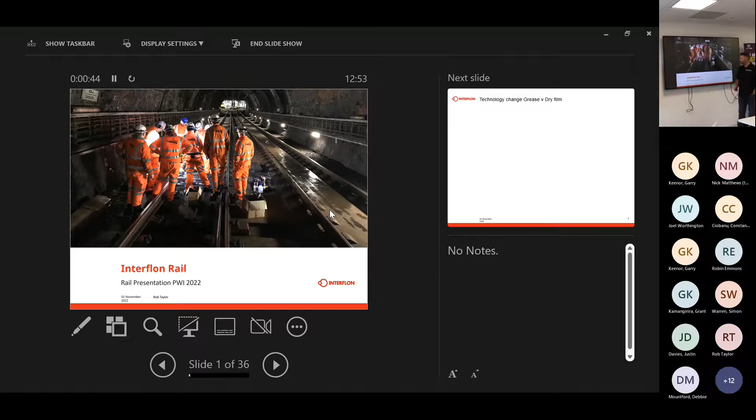So a little bit about the technology of the product, but I'm sure anybody who's been out on track is used to seeing this type of application out on track in switches. This has been around for many a year. It tends to be the more grease you put onto the slide chairs, the better it is deemed as being performance. And this is typical of Interflon's technology.

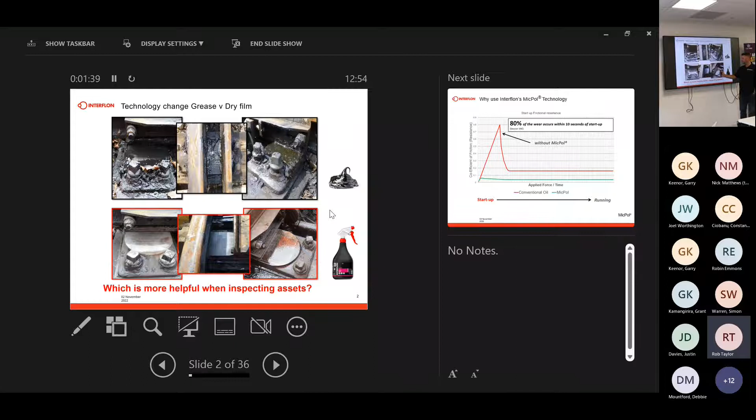And this type of environment and coating is ideal to do any track inspections. So why use MicPol? Well, the first 10 seconds of any machinery moving, you get what we call startup friction, and that's what the red graph shows here. So the first 10 seconds of movement, say for instance in a switch, you get all the contact between the two surfaces.

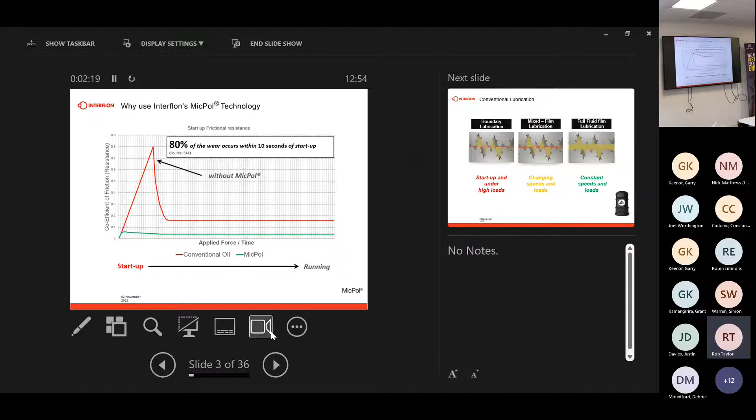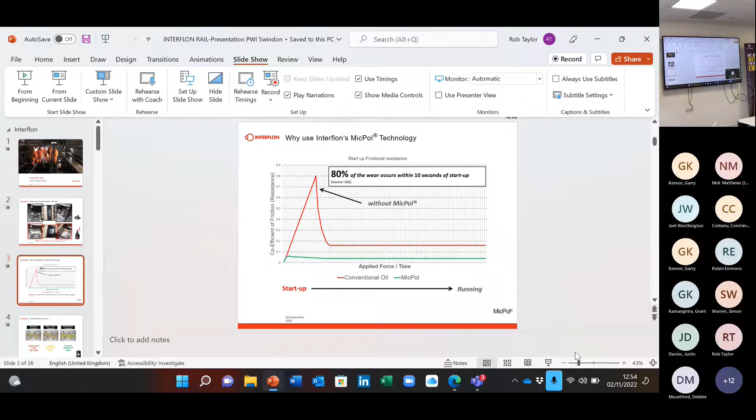Sorry, Rob, can I just ask you, Sarah has asked, can you change your display settings so you can see his notes? Yeah, so at the moment we're seeing you in presenter view. Sorry, it always tries to be crazy, wasn't it? Me as well, just bear with me. Right, so you want to go to slideshow, take presenter view off, and then is that F5? I can't see, is it down here? Is that better? Yeah. Yeah, yeah, that's it. I'll quickly go back then.

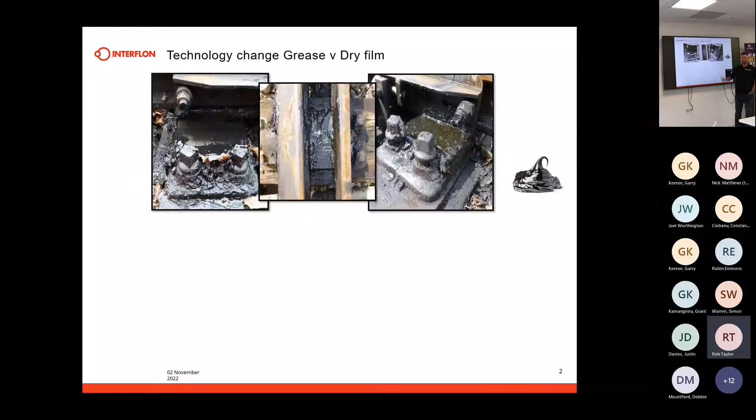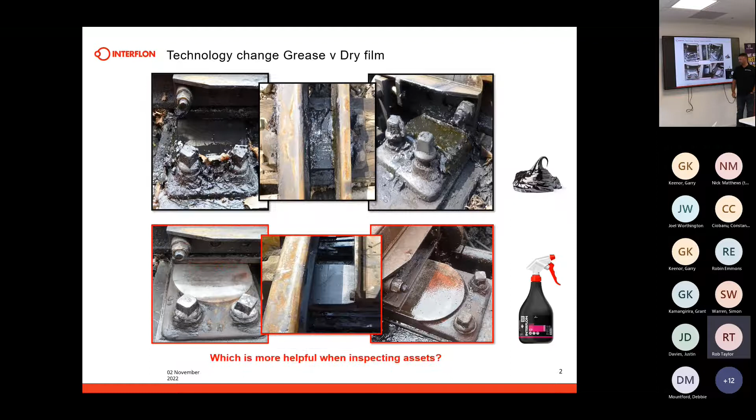So again, this is what you're traditionally used to seeing out on track. Copious amounts of grease, not ideal to do a track inspection. And this is what you're going to see with Interflon's technology, which is in virtually all our products. It's a completely transparent coating, ideal for the PLPR train that's out on track to be able to inspect. That's again an idea of where Interflon can be used to look for any defects in any components out on track. But this is a lot more helpful when it comes to detecting any cracks or issues on track.

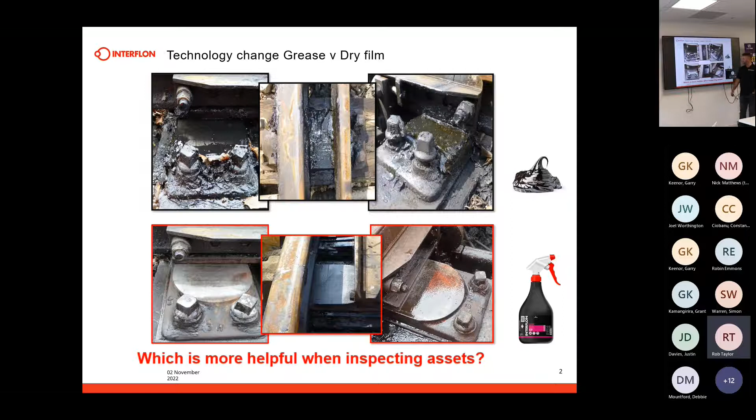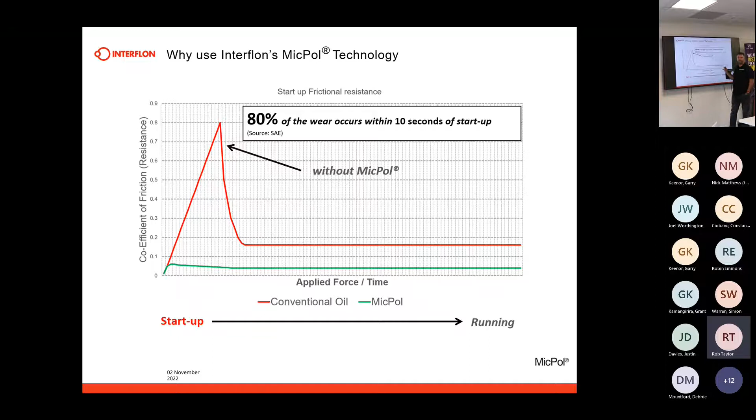So again, going back to the graph, any machinery that moves, you get this initial startup peak, and this is where 80% of the wear is caused within the first 10 seconds. Because obviously you've got no fluid film between the two surfaces, you've basically got two materials resting on top of one another. If you actually use MicPol technology, it gets away with this because you've actually got a physical film between the two surfaces. You actually get to the green line here, which obviously then increases your asset life, etc.

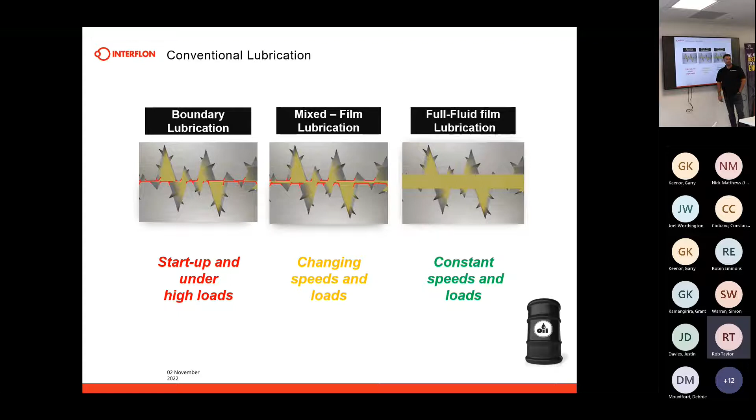This is typical of what you would have with standard lubricant. So this is where you've got the two surfaces resting together. It's not until you actually get to full fluid film that you get a full separation of the two surfaces. But then, of course, as loads and speed start to change, lateral loads when trains come through, you get back to this scenario. And this is again where you pick up a lot of wear of your assets. If you're going to make assets last longer, you need to be able to have that protection at startup.

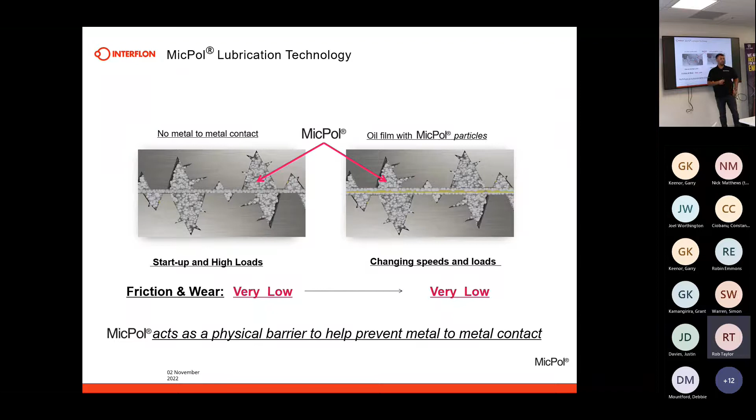Interflon now is very, very different. So we just don't rely on oil to lubricate and give you the fluid film. We actually have solid material particles in there that are less than the size of a hair follicle. So if a hair follicle is 80 microns, we're milling our products down to 0.1 of 1 micron. That then fills all the asperities within the surface, whether it be plastic, brass, bronze, steel, but also more importantly, it leaves a full micron layer, a hard fused layer to the surface. So you get rid of all the startup friction and all the wear.

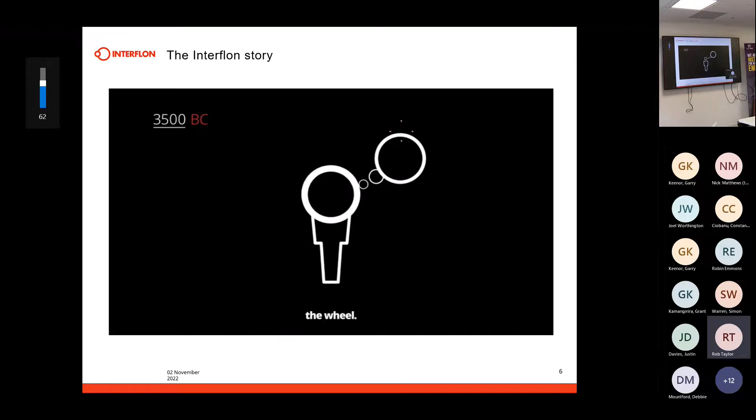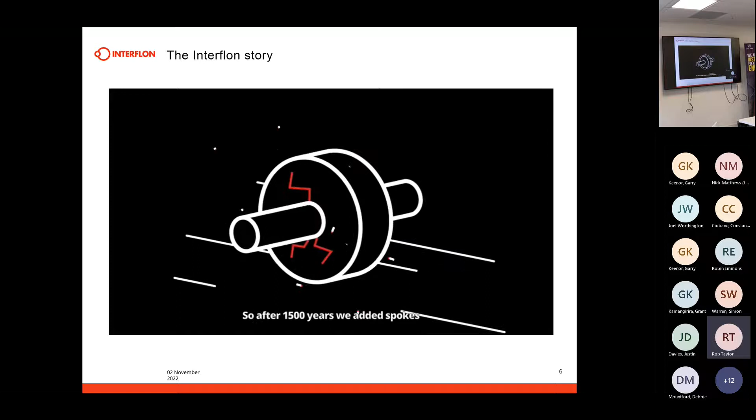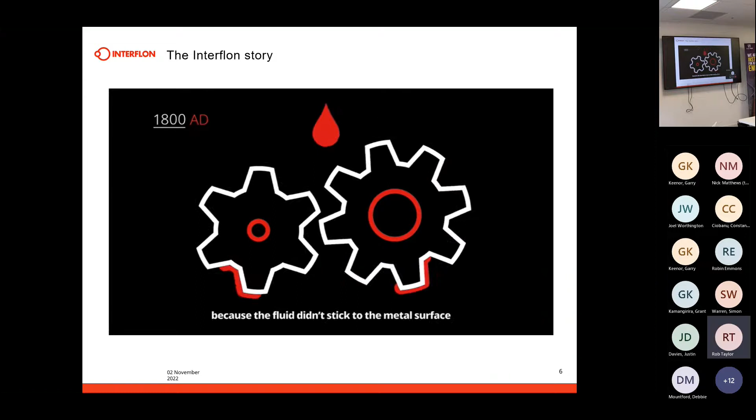3500 BC, humanity came up with a brilliant idea: an invention that would change the world by making a centered hole in the cylinder and adding an axle. That would enable heavy transport, but its use also meant friction. So after 1,500 years, we added spokes, but this didn't eliminate friction. And when the wheel evolved to gear complex machinery and even more friction, even the discovery of lubricant didn't fully solve it, because the fluid didn't stick to the metal surface, still resulting in wear and ultimately breakdown.

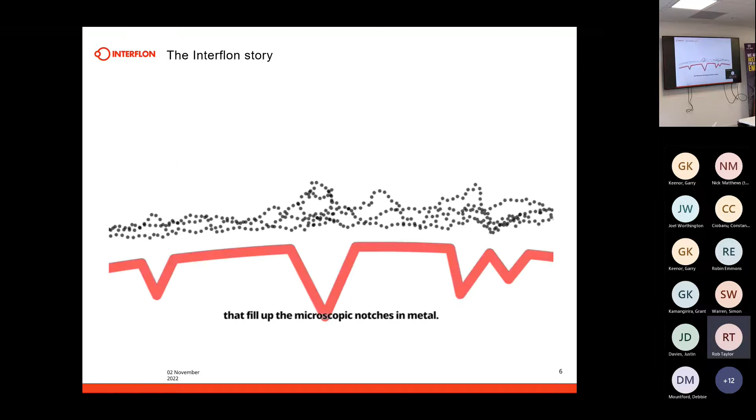Embrace innovation to benefit tomorrow. Interflon.

Okay, so MicPol is a process of particles. That's what Interflon specialise in, being able to break into particles and actually get them to stick to whatever we want to put that to. That can be any material, glass, plastic, brass, bronze, you name it, it can stick to it. And as you saw there in the video, we micronise the particles to such a size we can actually fill all the cavities up in the metal asperities and leave this bonded layer behind.

So we'll now go through what I know of Interflon, because again, it is a trade secret. So it's developed in-house by a team of scientists. We're actually owned by scientists. There's no commercial people in our business. It's owned by scientists. One of the chief chemists for DuPont, a gentleman called Dr. Wim Horsmans, was our founder.

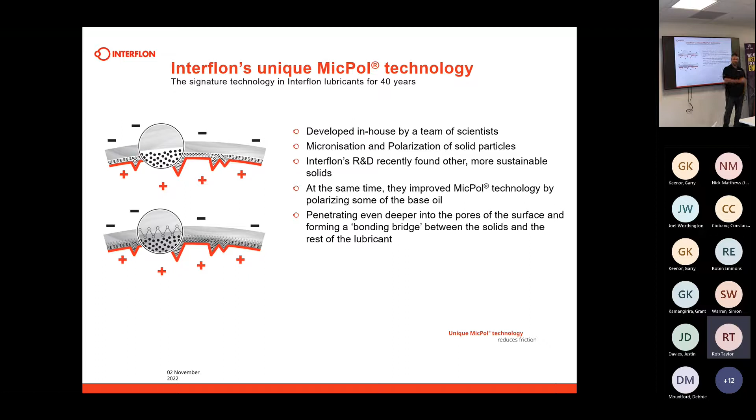We're now starting to see some tests that we've done in Network Rail, where originally they've gone from weekly or twice weekly lubrication using standard products into using Interflon, and now going 4 weekly. We're now using this technology, we're now going to be doing 8 weekly between lubrication intervals. So again, by having that technology, we can actually increase or decrease the lubrication intervals and obviously make the assets last longer as well.

So it helps with metal to metal contact and stick slip, as we call. It's also weather resistant as well. Whatever you chuck at it, we apply this product out in Taiwan that has horrendous weather conditions. This product's completely water resistant. Okay, likewise, it's hydrophobic. So if you've got ice adhesion, it's not actually going to stick to this product whatsoever, because obviously you've got this hydrophobic layer. And also as well, what's also important is what tends to kill lubricants is UV light. This product is completely resistant to UV light, so it can't deteriorate as well.

It is biodegradable, 98% biodegradable. But what I will remind people is, to get something to biodegrade, it needs to fall into the floor where there's the organisms, so the ground. So wherever it sits on the assets, it's not going to degrade. It's only going to degrade when it falls into the ground.

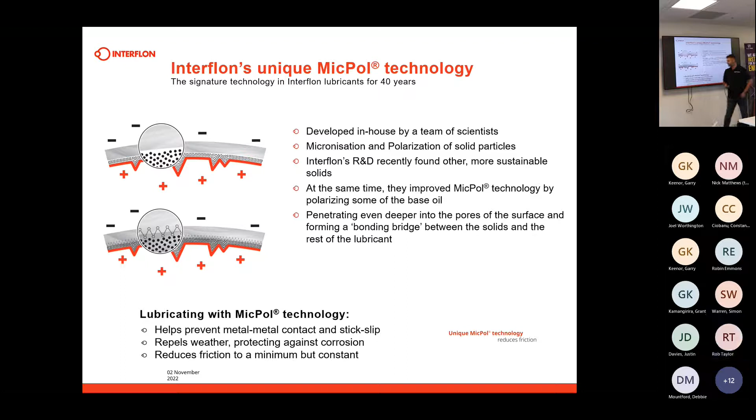So a little bit of the story of Network Rail and where Interflon came in. Interflon Lube EP, as I mentioned earlier, was developed for the German railway back in 2000. The scope was to develop a dry film, all-weather, transparent lubricant that would improve performance and reduce failure. It was a big ask, and it took a lot of development, but we got there.

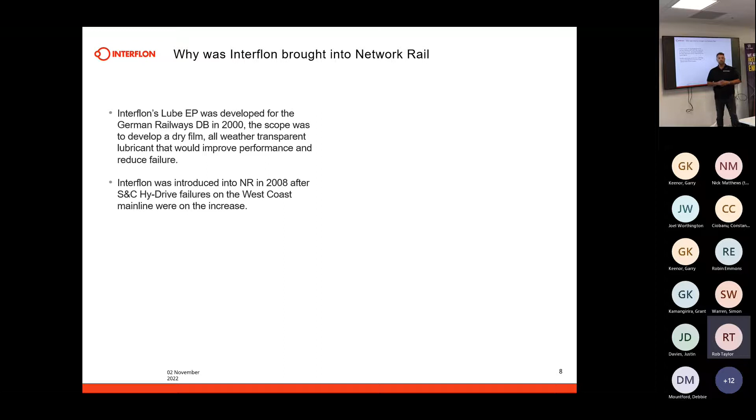Interflon was introduced into Network Rail in 2008 on S&C Hy-Drives. These were the high-speed switches that were actually installed on the West Coast main line. Network Rail spent £9 billion on the upgrade, and was having problems with these Hy-Drive switches. They were actually going to spend another £50 million trying to improve the problem.

That's when I actually got to meet a gentleman called Neil Denton. I'm sure a lot of you will know Neil Denton. He's part of the PWI as well, and does quite a lot of seminars. Neil met us and thought it was a great idea, so we first got introduced back in 2008 on the West Coast main line.

The testing was carried out by senior engineers within Network Rail, including the chief engineer now, Martin Jones, who was pivotal in testing the product - but it was tested by Network Rail, not by us. We actively encourage people to test our technology themselves, because it's all right us saying that we've got the best thing that's going to work on your asset, but you've got to really prove it to yourself. The product was approved after 2 years of senior engineers testing on all routes - it was quite a quick product approval, really.

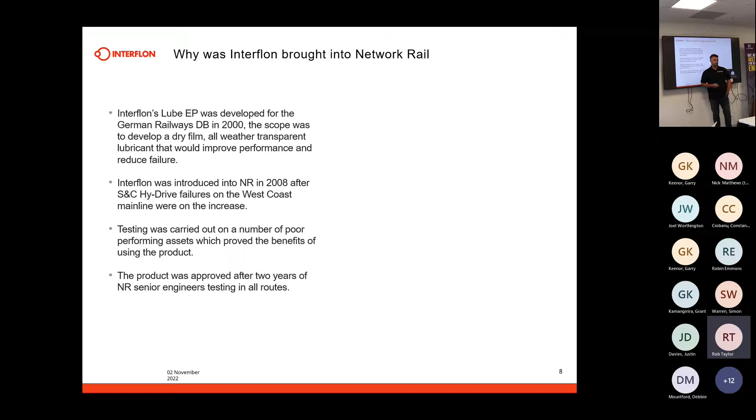These are just a couple of graphs. The first graph in the top corner here was on the East Midlands. You can see all the failures in the form of the different colours here, mounting up. Interflon was applied here at the top one, here on the second one, so on and so forth. But what you actually see is the failures just plateau. It clearly shows you that Interflon had a quite significant effect on the performance of those assets.

Likewise here, these are the high-speed switches. This was in London North Western South. The number of assets are here in purple, and the blue line is actually the failures that those assets are causing. As you can see, the more assets that get introduced, the failure goes up and up and up. The yellow line is when Interflon was actually introduced. You can see the Interflon was first introduced, and this is quite interesting - the more assets it's actually applied on, the failures come down to virtually zero. So again, showing you that the technology had a big influence on the performance of those high-speed switches.

Also, Schwehag - everybody knows Schwihag for rollers. They're independent, and they've got a special machine that does a lot of the testing. What they wanted to find out, or what Network Rail wanted to find out, was what was the difference between this coating and another coating. Molybdenum is a coating that Schwihag use - it's used on a lot of different asset types. This machine actually simulates a switch. For this particular one, they actually put an extra 300 kilos of load on the switch rail, put it on a cant, and introduced humidity into the chamber as well, so they could simulate any time of the year.

What they found was that the friction started here, at 0.5. By the time it had done 20,000 movements, the friction had been so high that the rig failed. So you could say molybdenum is good for 20,000 movements, but the friction does increase from the first movement. However, with Interflon, it surpassed 20,000 movements and went to 70,000 movements, and that friction coefficient is a lot straighter line than this one. If I just add that over the top, just to give you an idea - the friction starts here on a molybdenum plate and here on an Interflon plate. So you can clearly see, again, the coating has a significant effect on friction levels.

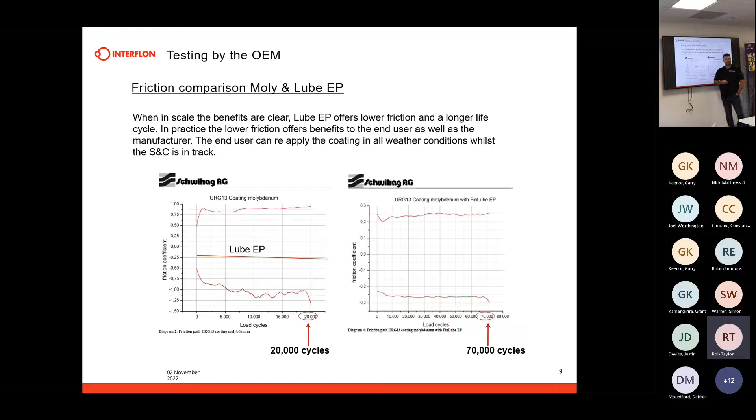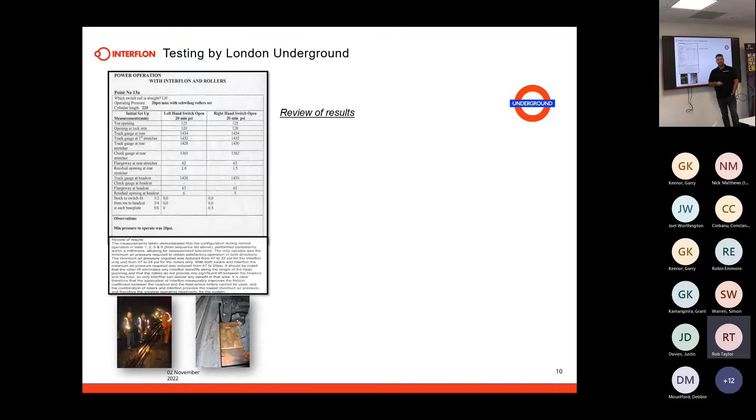It's also very constant. This is a London Underground test of rollers and Interflon, to see what benefits you'd get with one or the other, or both. Because they use air pressure in the tunnels to move switches, they needed a large headroom between pressures. If you had added weight or problems in a switch, your headroom was reduced. They wanted to increase that.

What they found was if they used Interflon alone, pressure dropped from 47 psi to 32 psi. If you used rollers alone, it dropped from 47 psi to 24 psi. Obviously, rolling friction is much lower than sliding friction. However, if you put the two together, there's an advantage: it drops from 47 psi to 20 psi.

A lot of people say if you're using Schwihag rollers on layouts, you don't need lubricant. Actually, this proves you get added benefits from using the product. Plus, you have to remember the heel section, the bit that doesn't move at the back of the switch—you can't get a roller under that position. That's purely where you're relying on low friction. It says here: this does not provide any significant lift between the head cut and the heel, so only Interflon can deliver benefits in that area. From the fixed position at the back of the switch, you're purely relying on low friction, and that's where Interflon can benefit.

There's also another benefit we've learned over the years working with Network Rail, particularly the S&T guys: you can have a problem when a switch rail falls off a roller and back onto the slide chair, because there's still potentially 4 or 5 mil of fit up before you get detection. At that point, a lot of the switch can get back onto the slide chair and you can get high friction. So we've seen a big benefit of putting it all the way through Schwihag layouts.

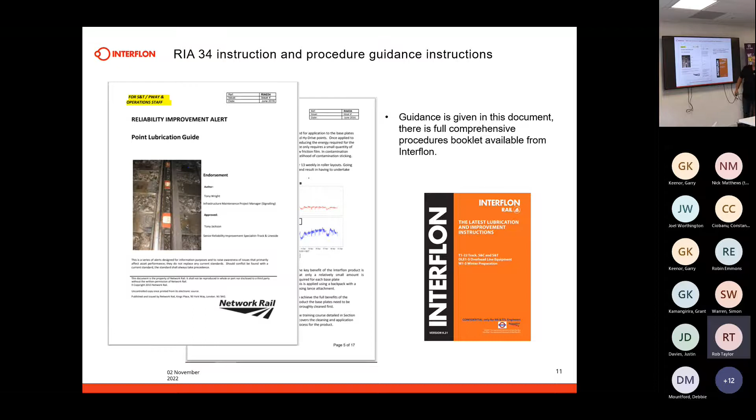Quickly showing you how this product is actually applied, because traditionally you'd use a bucket, a Turk brush, and blast everything with grease.

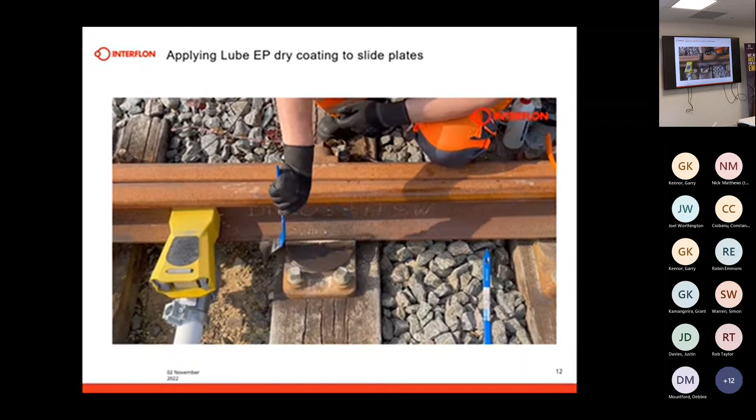Very quickly to apply, you're looking at 1 minute through an average C switch. You'll also notice the switch wasn't reversed—you don't need to. This product uses capillary action to get under the switch and into the heel section. The other thing shown at the end there is applying the product in wet conditions, because we call this a dry film product. You can apply it in wet conditions, and it can take contamination straight away and just brush it straight off.

That was dry sand. You'd expect a wet lubricant attracted to dry sand to create grime in place—quite the opposite with this particular product. Also, you only put on 1 teaspoonful per slide chair. You don't put much product on, so it doesn't make its way into the ballast, so it won't need to degrade because it doesn't get there.

The other important thing about this product is it's not designed to migrate to the rail pad. A lot of people don't think about the rail pad, but if you get lubricants onto a rubber rail pad, you can get what they call delamination. Delamination is not ideal in a switch, particularly when you come to the toe load on a clip. If you degrade the pad by 5 mil, whatever the pad size is, you're actually taking the toe load off the clip. So again, Interflon is not designed to migrate to the rail pad.

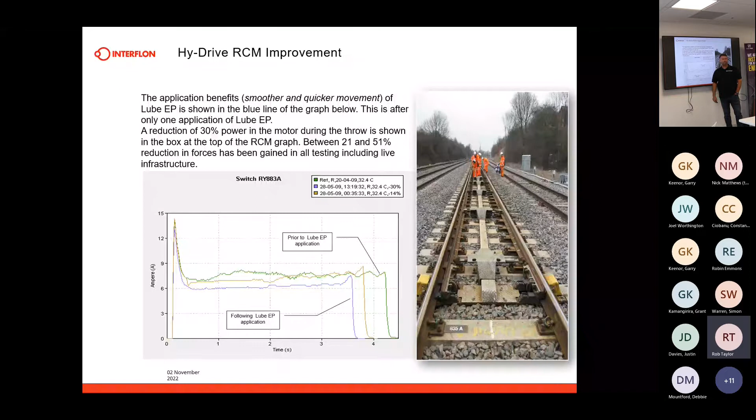So again, it not only reduces the friction, but it can also reduce the time to throw as well. And on the RCM graphic it clearly shows there was a 30% reduction in the power needed to throw the switch. We've done this consecutively throughout different types of switch lengths and switch types where we actually use the product.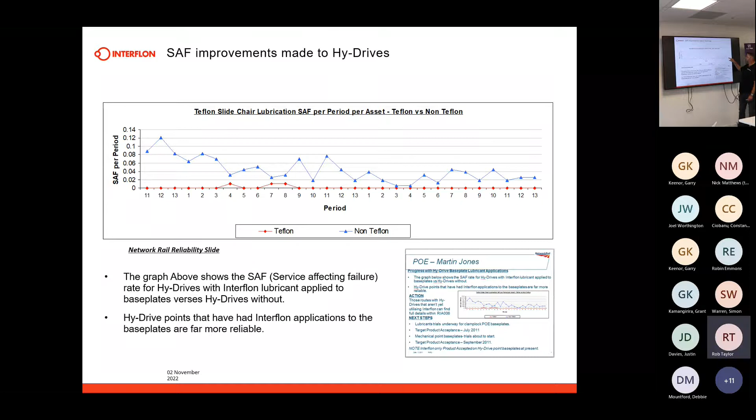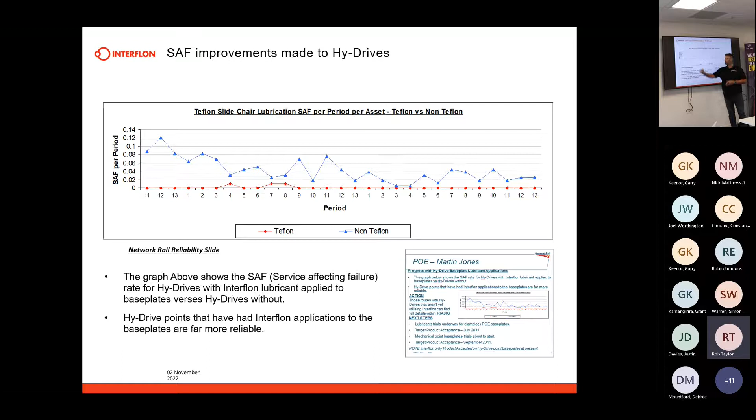Again, another graph here, this time from Martin Jones. So the blue line here is showing your failures using traditional methods. The red line is showing your failures using Interflon. But as you can see, the more ends that Interflon go on, the failures come right down. But what is important is these 2 humps here - that's because they actually ran out of product to put on the slide chairs. So again, it clearly shows you that when you don't run out of the product, you can get to 0 failures.

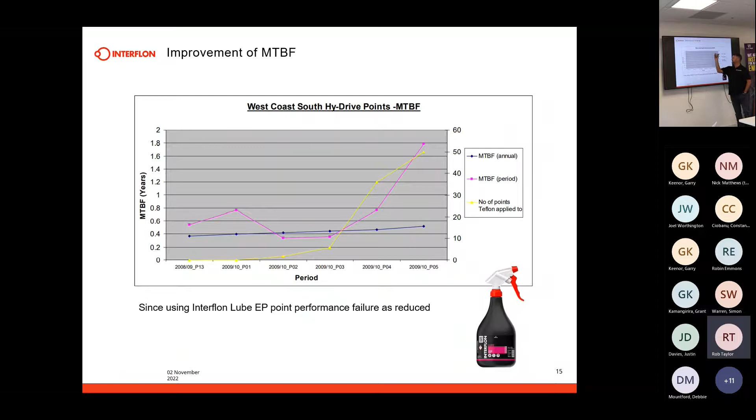And again, this is the mean time between failures. So this is where they were prior to Interflon shown in blue, and the yellow is using Interflon there.

So, Bristol DU on your patch - this was from Dan Collins. This goes back to 2015, 2016. They saved in failure costs over a 3-year period £1.3 million. Sometimes called wooden money because it doesn't come out of your pot, but still it's a saving there, £1.3 million. But more importantly, 627 less point failures by using the technology, reduced overall by 80%. That's from the Western area.

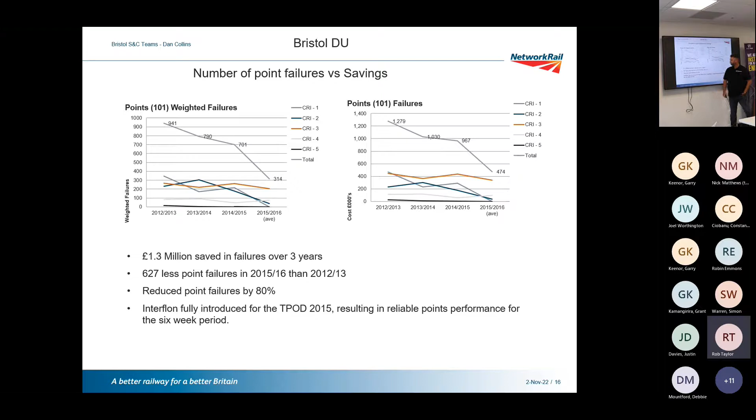We also go back 17 years ago when we first came into Interflon, a gentleman called Richard Owens was one of the route directors for the Midland route. He actually wanted to keep people off track, very much like the safety task force is doing a very good job of doing now. So Interflon have thought about this over the years, and we've actually designed a dispensing system.

So effectively, you can put this onto switches. It can treat up to 2 or 4 ends under one single system. It sits in the cess. You fill it up once a year, and it can actually put lubricant onto your slide chairs. It's actually in development now, because we'll actually show you shortly. So yeah, it applies Lube EP.

We actually developed this system 6 years ago. It went out on track. It was very successful, and it was just about ready for being signed off, but then Network Rail lost its way of what it wanted as a priority, so it got shelved. We've now brought it back out. We've moved to newer technologies and we've made the system even better. And again, it does work very, very well.

It's a clip system, so it clips onto the track. It only takes 30 minutes to actually install it. Likewise, if you tamp it, it's not a problem because everything sits inside the four-foot. And if you're actually changing a set of switches, you can undo the clips, put your new set in, and re-clip it back up in 30 minutes.

And this product is actually being looked after at the moment by a gentleman called Tony Wright in the TA. So if anybody's interested in that, Tony Wright's the gentleman to speak to.

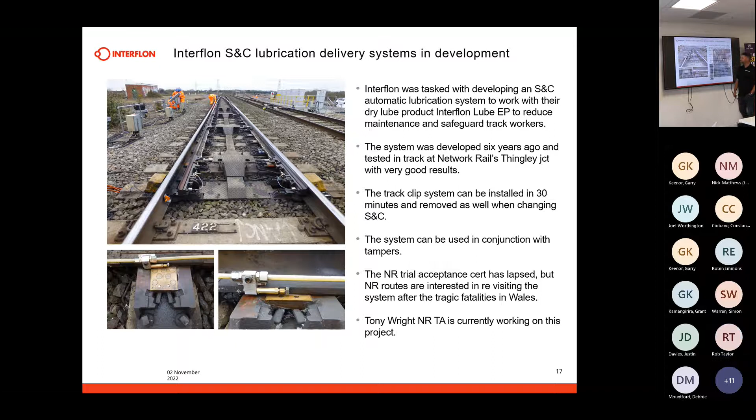So what benefits does it offer the S&T guys? So these are the HW and 63 machines.

We were asked by Scotland whether we could transfer their lithium grease onto our lithium-based grease material, but again, a dry coating. This product's called OG grease. Spray it onto the open gears.

Okay, this is the difference that it makes on the graph. Again, it's a very thin, dry coating, but one that does reduce friction on the gears as well. That's fully been tested, so everything's got product approval.

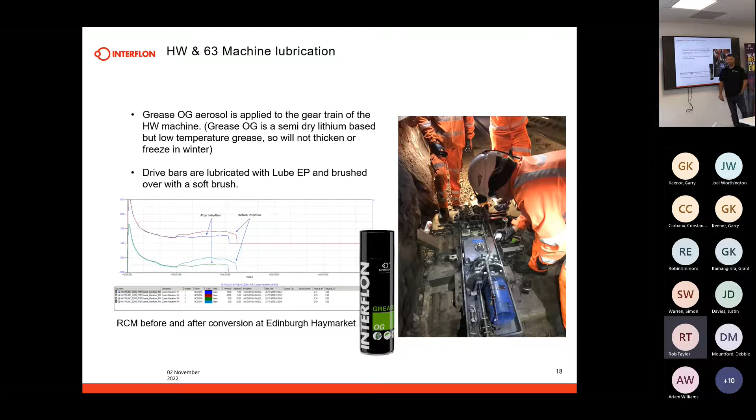Switch tips. So this is where traditionally the guys have gone along and put 3 dabs of grease onto the front of the switch, and then relies on the flange of the wheel on the train to actually spread it through the switch length.

With our product, you don't do that. You spray it all the way through the head planing length. This guy's just going to quickly show you just in front of the switch, and then through the switch, all the way through the head planing length.

And again, this forms a dry but transparent layer. This product's now been approved for this application, I think over the last 6 to 8 years. I think it's also part of the Network Rail specification to use this product.

Showing you here on the right hand side, that's actually got it coated, so you can see it's completely transparent. Obviously the guy at the top there spraying it.

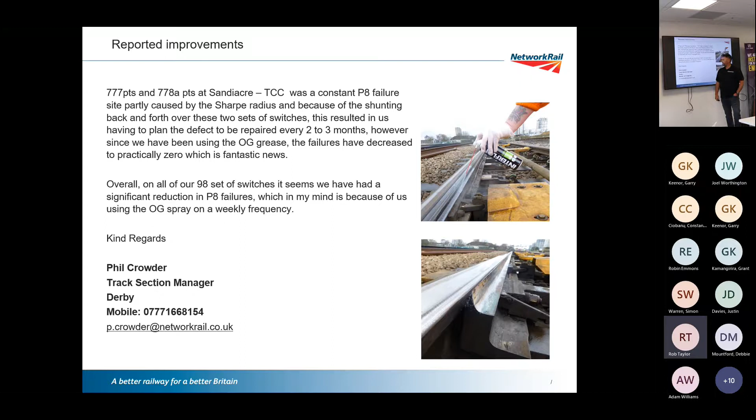This is an email that came from a gentleman called Phil Crowder, basically saying the performance of the product has actually made a big improvement to his failures on his switchblades. So his P8 failures had massively reduced.

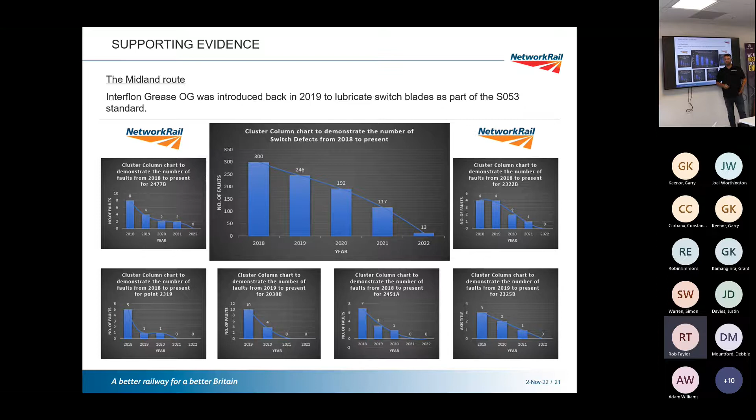So it reduces the lateral loads and the contact fatigue you get between the flange and the rail.

Schwihag rollers, again, East Coast Main Line and quite a few of the S&T guys now using Schwihag rollers. It can actually rejuvenate the lubrication side of the Schwihag roller, but also if you've got a failed roller out in track and the S&T guys are out there to go to the failure, you can actually get a failed roller running in track.

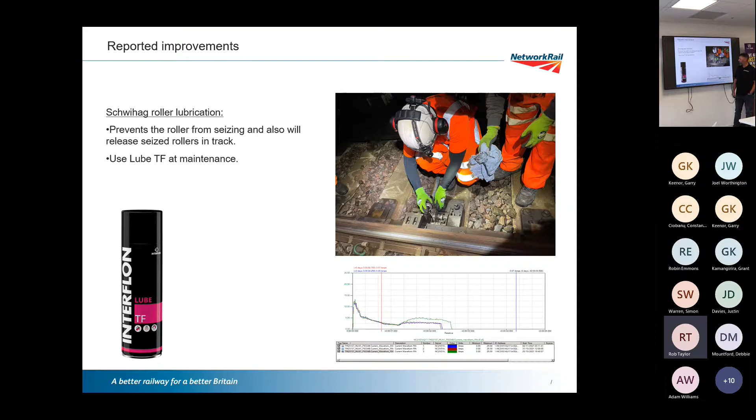And that's the actual graph there. You can see before and after. It seems to be a general use product now, and that's Lube TF.

Again, this is LNW South, so this is the Bletchley DU area. This is data coming back from the STME, and you can see they obviously were challenged to beat the target by 20% on the failures that we're getting on clamp locks.

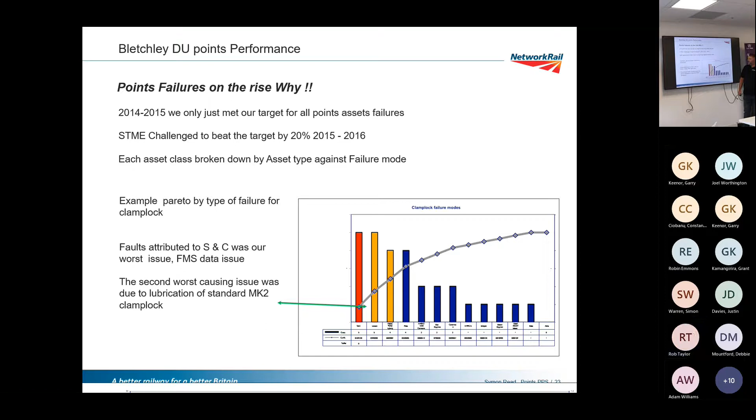What did they do? They completely changed over all the clamp locks to these Simalube systems. So this is an automatic lubrication system for a single point lubricator.

If it's up in the air, you can put it up there for a year. You can pipe it down to ground. It's got enough power to be able to get lubricant to wherever you need to get it into.

This can actually deploy oil, or it can deploy grease. Fully reusable. So again, once it's dispelled, you can fully refill it. It's filled with a hydrogen pack.

These systems are made in Switzerland, extremely good. If you've got areas where you've got flooded components, again, these things work underwater. But again, this is what LNW South completely changed over to.

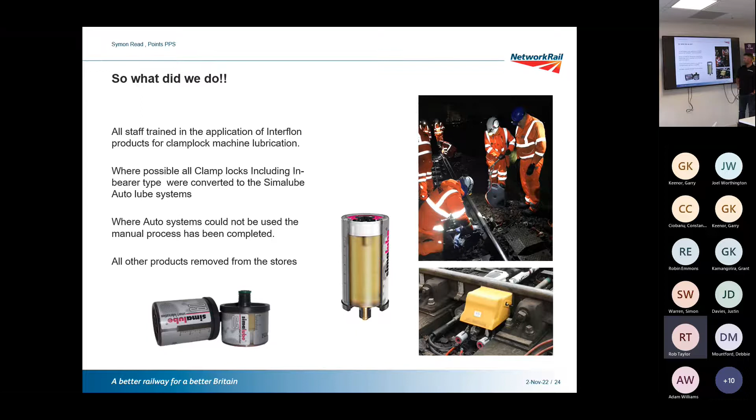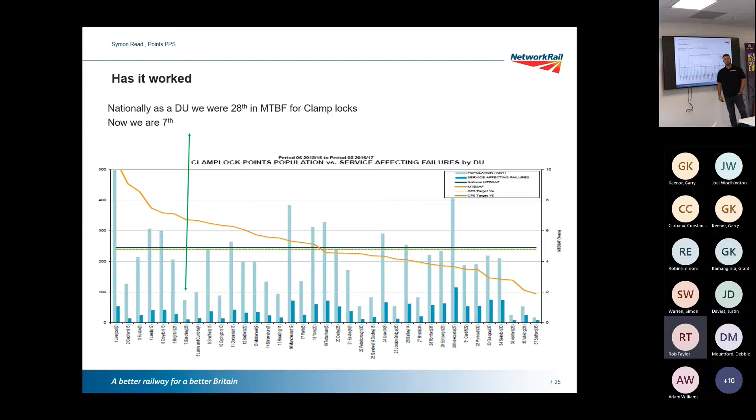Again, these are on cranks. So again, the products can be used on cranks. And again, LNW South have been using it the longest on cranks. They've gone from failures to 0 failures on cranks.

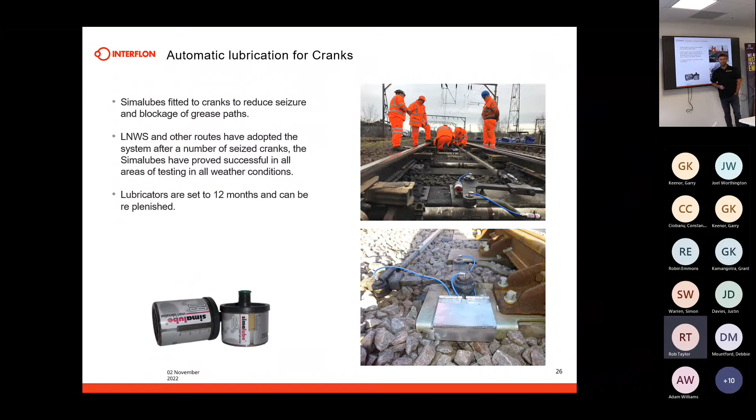Barrier pedestals. Again, you can use the product in barrier pedestals. Again, fully approved.

And then the next application is fish plates. So there's a lot of fish plates up and down the country. Traditionally, you would back off the bolts, pull the plates apart, clean everything, put new lubricant in, bolt everything back up. That's normally a 4-man job, 2 teams of 2, and that takes roughly 20 minutes per joint, something they have to do every year.

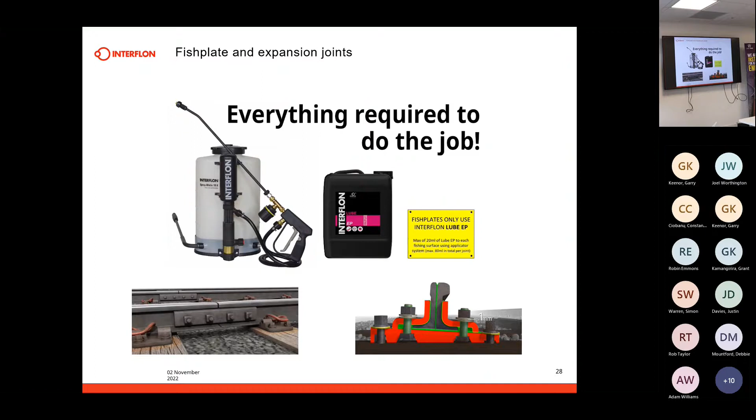So you go from 20 minutes a joint to 30 seconds, a 97% efficiency saving. As you probably noticed there, even I was actually lubricating the joint.

You don't need to back off the bolts. Again, it uses capillary action. No matter how tight the bolts are, it will actually get in. It roughly takes around about 50 minutes to penetrate in. I'll show you a little video shortly, no music added, to show you how well it actually penetrates in.

But the areas have already started to use this and had some fantastic results. What we also found, which we weren't expecting, was a graph that showed if you use traditional black grease, the load between the fishing surfaces was around about 23 kilonewtons. When you actually clean that out and put Interflon on, it drops from 23 kilonewtons down to 2.

What we found in Wales was, when we actually did a full stretch of around about 15 miles, we also found that once we started lubricating every joint closed, the track started to regulate itself. That was an added advantage we weren't expecting. Yeah, it will actually self-regulate.

The 10-litre drum will do about 125 joints. All you need is a backpack and the 10-litre drum, and away you go. There is also a process to change over the bolts as well.

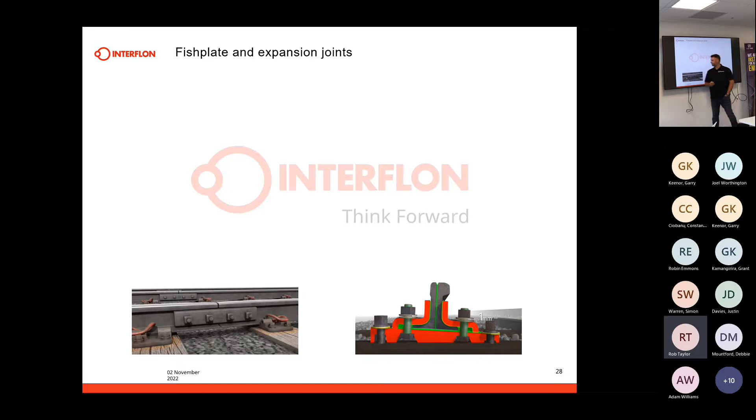You can actually lubricate without opening the joint. It does take one person 30 seconds. It's roughly about 15 minutes. If you just open up the joint after 50 minutes, you'll see it's on every fishing surface.

So you can upgrade stretches of line from black grease joints to dry film joints. It's recommended that the approach is taken to upgrade every fifth joint. There is actually a derogation from engineering to do a complete changeover for Hardlock nuts and Interflon.

This is just showing you how well it penetrates. We've got product and food dye here.

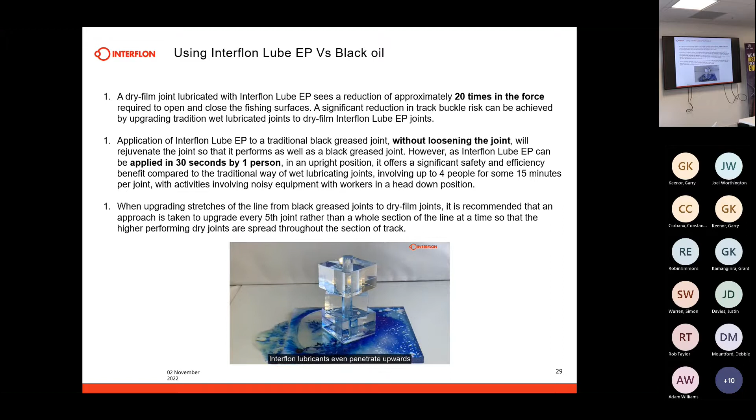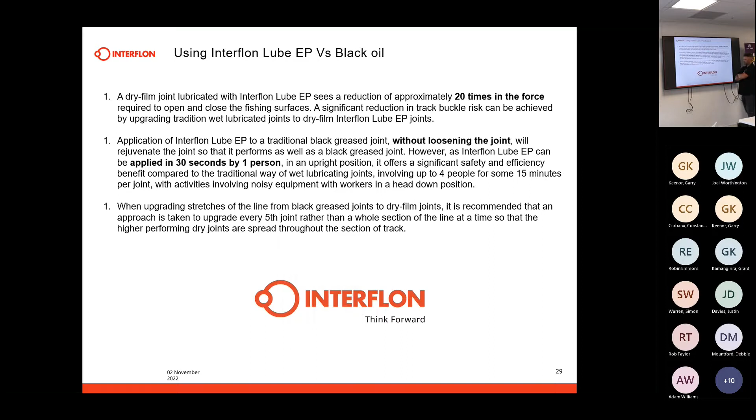Yeah, so that was obviously a bush and a pin tightly closed. A bit of product with a bit of food dye, so you could see it, and obviously it's just sped up. So yes, it's an exceptional product for getting into anywhere you need it to get into.

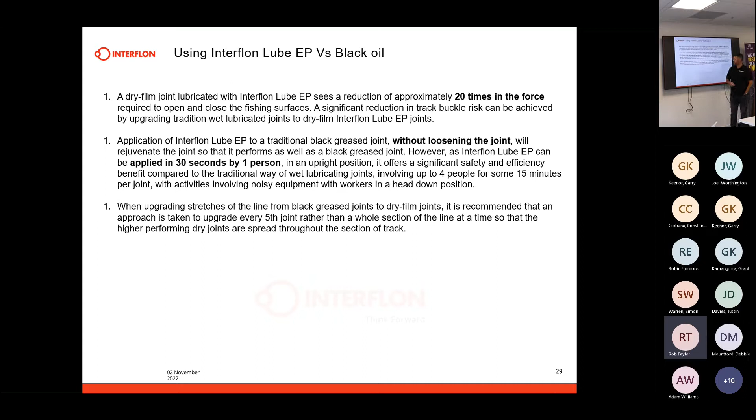These are the Hardlock nuts. I don't know whether the OLE guys have started using these. I certainly know there's been an inquiry about using them because there have been some issues with bolts coming undone. These do not, as far as I'm aware. Well, as I say, they are being looked at now on the OLE.

So what you've got is an offset cam, and you've got a concentric top. Effectively, as it shows you here, it's pushing this way. It's also pushing up as well with the threads, and it locks against the cam. If for whatever reason, through vibration, the bottom nut turns, it tightens back up against the cam again.

These are actually used out in Japan, and have been used in Japan for the last 30, 40 years. No issues at all. They're also used on stretcher bars after Potter's Bar - all the stretcher bars that are in S&C. So again, if you used these nuts and bolts on the OLE, they're not going to come undone under vibration.

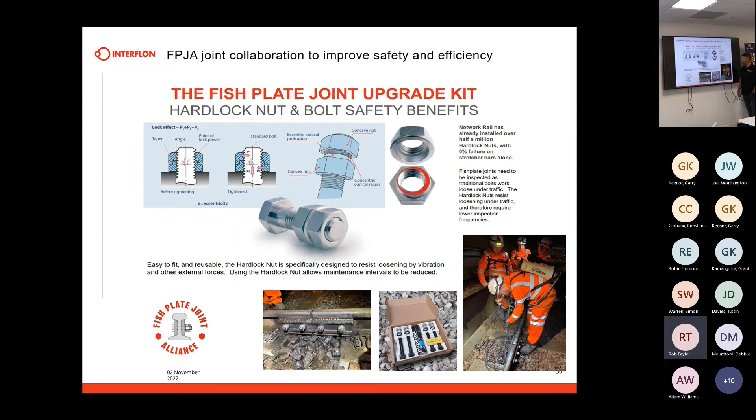We're in the autumn season now, and we've got a leaf cleaning product called OTR. This was a bit of a challenge by Steve Featherstone back in the day, to come up with a product that was good on cleaning leaves and was as good on slide chairs.

So it got us thinking, is it just the leaves we need to clean? Because if you're just cleaning the leaves, you're just being reactive. We thought, no, it's not just about cleaning leaves. We also need to keep the product on top of the railhead for some time, but we also need to take off the oxidization, because if we take the oxidization and rust off the railhead, we can actually increase the friction. We normally used to go the other way, reducing friction, and we developed this particular product.

So what this product actually does is you apply it to the railhead, it gets into the pores at micronized levels, it stays in there, and it sucks any moisture in from the air. Once it sucks the moisture in, it keeps reactivating and reactivating, it keeps cleaning the railhead, and we've had fantastic results with this product. It's 98% biodegradable, we use organic material, so it's very green.

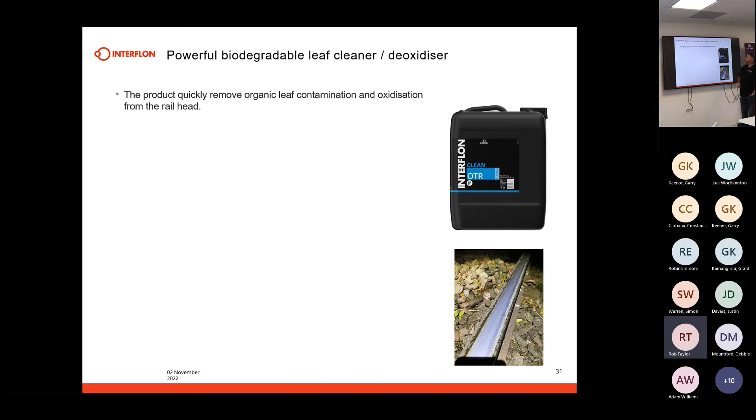But I'll show you a couple of videos in a minute. So it quickly removes organic leaf contamination and oxidization from the railhead. It reduces adhesion issues and the risk of wrong side track circuit failures, and it only takes about 1 to 2 minutes to clean any contamination off the railhead. I certainly know when the RHTT trains have gone through the track, depending on speed, that determines how good the quality of cleaning is. But this stays in that condition for some time.

No need to rinse with water or wipe the product. It self-cleans and leaves a micro layer, which activates with rainwater moisture or any RHTT train. One of the other things we found was because it fits into the pockets of the railhead, when you get positive pressure from the RHTT train, it pushes down on top of the pocket, so it keeps the material in. Effectively, it puts a lid on top of the pockets, so it keeps the material there. The surface stays clean for longer.

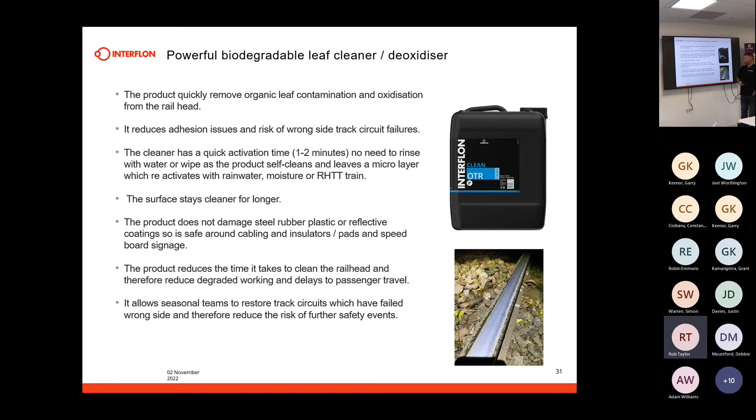It does not damage steel, rubber, plastic or reflective coatings. It's safe to use around cabling, insulators, pads, speedboards and signage. The product reduces the time it takes to clean the railhead, therefore reducing degraded working and delays to passenger travel. It allows seasonal teams to restore track circuits which have failed wrong side, reducing the risk of further safety events. People who tested it last year got a layer of this product on before the leaves fell this year, and they found they've not had any leaf contamination issues to date.

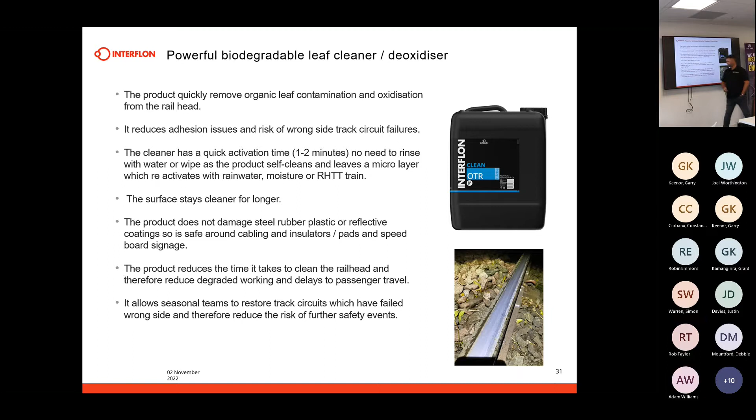So this is going to show you now how it works. This one here on the right shows how effective it is and how easy it is to apply to the railhead - it literally is drops, you put very small quantities on. If you apply it by an MPV train, which they're going to do next year, it's roughly 1.5 litres per mile, so very small quantities. On the bottom here, we're going to show you how the rejuvenated layer will still remove leaves very easily.

I'll do this one first. This was applied 10 days earlier, to stop leaf contamination on top. It's rejuvenated itself - in a quick wipe it literally brings any leaf contamination off. And again, an RHTT train will just take everything off.

And here to the right, it's been applied through a pram. See the black layer of leaf contamination - this rail we did 2 minutes earlier, you can see the amount that goes on, and this rail we did 2 minutes earlier as well. You can see the difference.

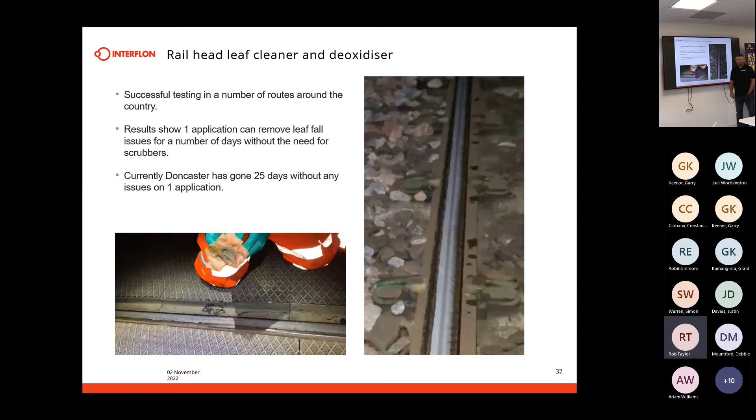It is that quick. If anybody's interested, they want to reach out to me, I can put you in contact with Network Rail people on the ground who are using this stuff all day, every day - they'll be able to give you their experiences. Again, this is from Middlesbrough.

Shows you the befores and the afters. That's after following 10 minutes. Really does work very, very well.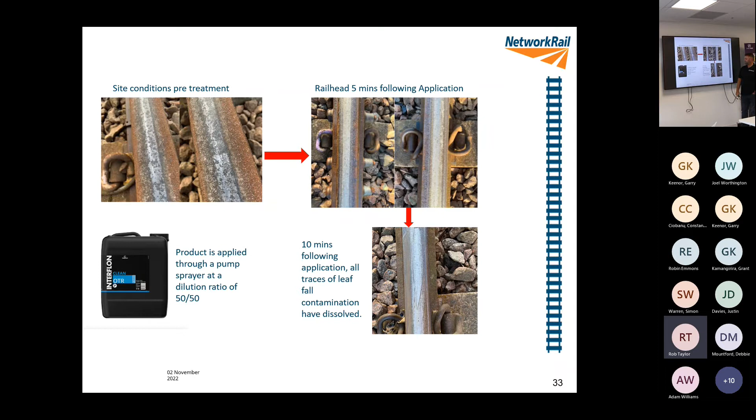You can also dilute this product with water. If you've got heavy contamination, you can put it on neat. If it's not as heavy contamination, you can get away with diluting it 1-to-1 with water.

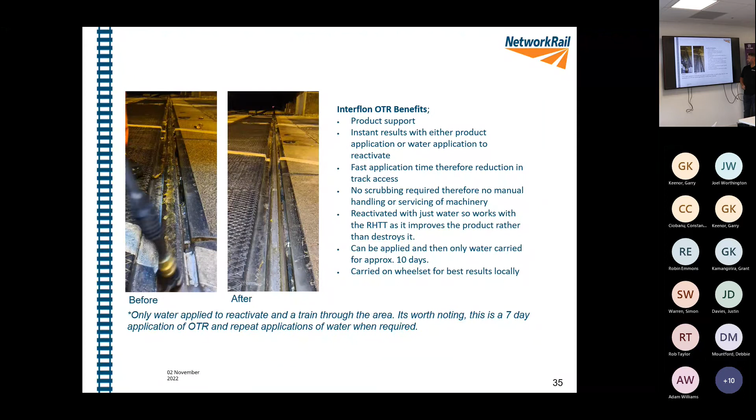This is information from Middlesbrough. Again, this is from Doncaster. It can be applied and then left approximately 10 days. Very good results in Doncaster. They actually got to 25 days between applications in Doncaster as well.

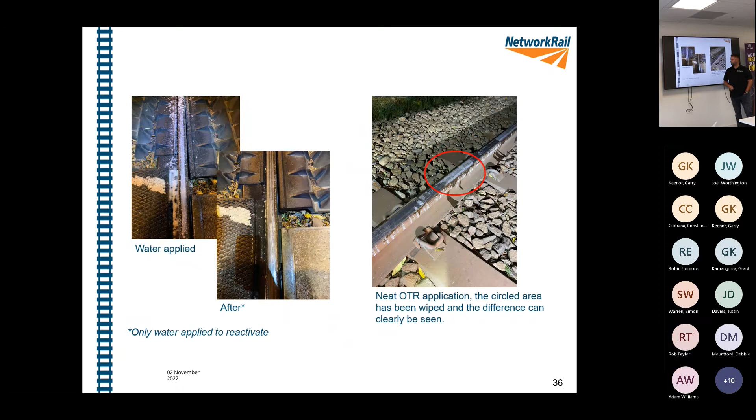Obviously, you've got track circuits and things - it's got the layer that we're adding in between the rails. Is that causing any problems with the track circuit and detection? No, track circuits have stayed up when this product's been applied, and stayed up for some time.

Seems like a miracle, it seems too good to be true, doesn't it. There is a little bit of that, and that's why we always say to engineers, try it yourselves, don't just believe us. We can put you in contact with lots of people around the world that use the product. The biggest thing from our point of view is people - you've got to want to change, you've got to want to look at new technology, and there's lots of new technology out there. If you're interested in change for the better, then Interflon's an ideal partner to work with.

Do you find operatives tending to over apply it, because they used to sort of spray and pray? Yeah, that kind of lubrication. Absolutely, and that's why we insist that we keep going out and retraining. Because at the end of the day, what you'll find with this product is you'll put small bits on and it works. Initially, when you put it on, you think more's better - it's actually the other way around, less is more of this product. So we do educate people on a constant basis, and we also train the trainers so they know exactly what they're training on. We also get a lot of people, the guys on the ground, saying, you know what, we've tried it on this and it really works well. We're happy to support them going to engineering and asking if we can use it for this, etc. Obviously we toe the line with regard to what engineering approves, so that's what we've always stated.